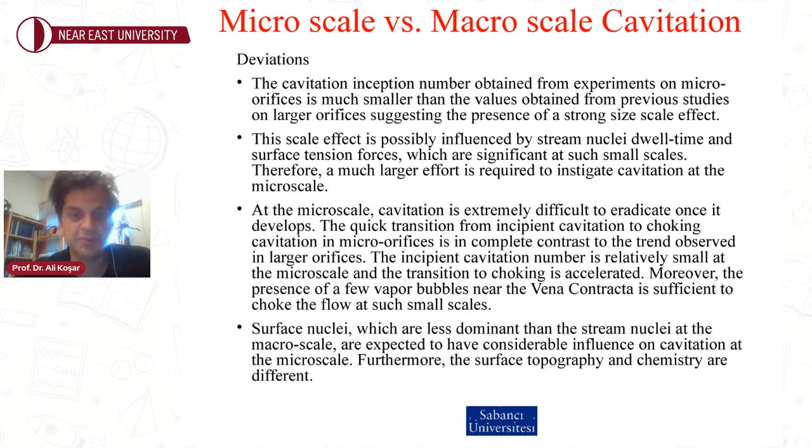And due to the small scale of our system, we could have flow choking. What I mean by flow choking is that we cannot increase the flow rate beyond a certain value. And we have nucleation from the surface, so surface nucleation is more dominant at small scale, meaning surface topography will be important.

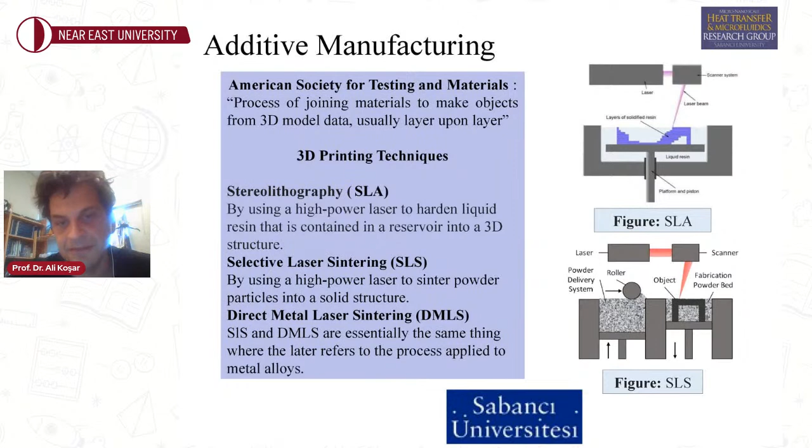And for fabricating the probe, we exploited additive manufacturing. We used three techniques: one, stereolithography; the other, selective laser sintering; and for the final version, direct metal laser sintering, where we have the metallic probe, and we use this metallic probe in in vivo experiments. So we exploited three techniques.

So for stereolithography, we could have a resin material version where we could at least make preliminary tests and have an idea about how the system will function. And then we used SLS 3D printing, where we will have a nylon probe.

We use this nylon probe for in vitro tests, and we could also integrate our actuator to this system, and we could both manually and automatically control this and find target using this probe.

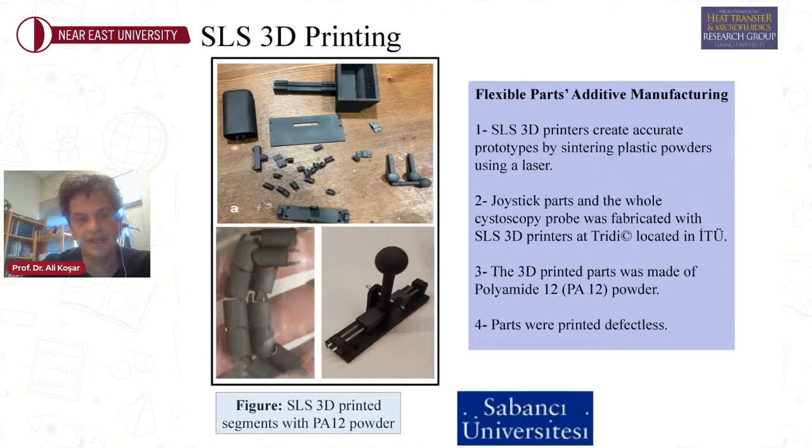And for the final ones, we used aluminum alloy, and we use this version in vivo tests, and it's more durable and also rather light. So we used a metal printer located at Fatih Sultan Mehmet University, and we could fabricate the needed parts, which were defectless and suitable for in vivo tests.

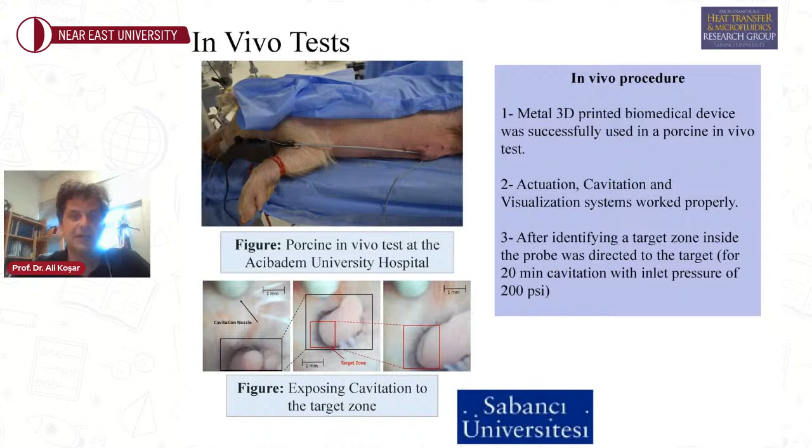We have erosion. However, there was no obvious damage in the area around the defect. So we were happy about the local characteristics of our approach.

So this is, of course, a target which is of conventional size. We can also use this approach for targets which are small, so we can really bombard a certain small target using this approach, like with a lab-on-a-chip version.

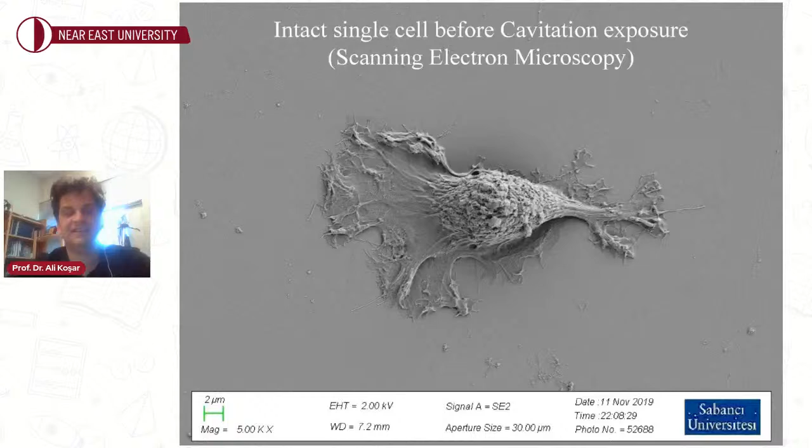So this is what we have. First, we have craters, then we have damage of the membrane, and then we have fragmentation of the entire cell. So we can have different modes of damage.

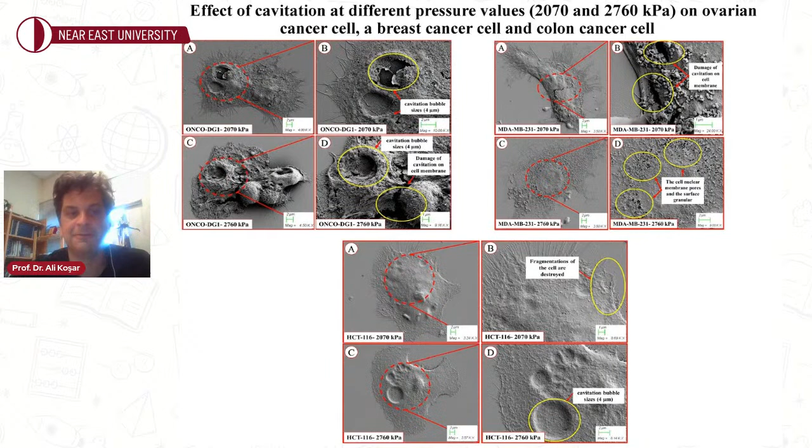And we can, of course, use different cells. Depending on the cell, under the same condition, we have different modes. For example, one cell is more durable, whereas another is less durable. So based on the damage, we can then see different modes of damage on each cell.

But if we have low intensity, the damage is very limited and cannot be detected. If the intensity is too high, we cannot see anything either, since we have pieces of the cell. But if it is something in between, we can really see the differences in the damage on a single cell.

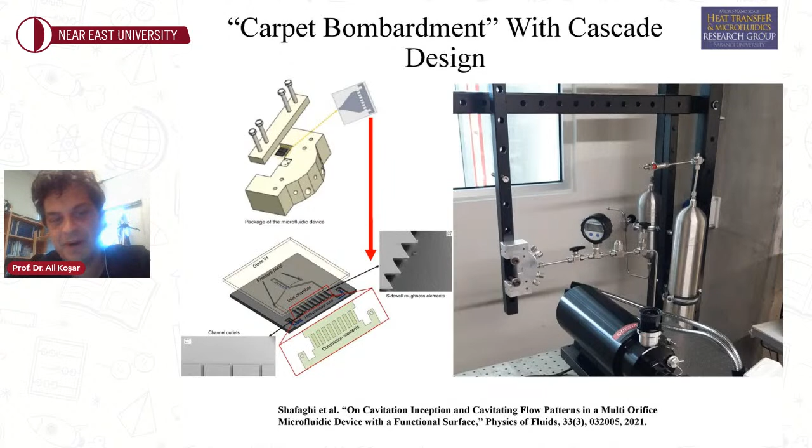So we can also use this tool to characterize the properties of a single cell or tissue. And for tissues, for larger samples, we can have multiple orifices, as you can see from here, and have this cavitating flow from multiple orifices, targeting larger tissues compared to a single cell.

So it is also possible to test them in a lab on a chip device. I think I'm almost at the end of my talk.

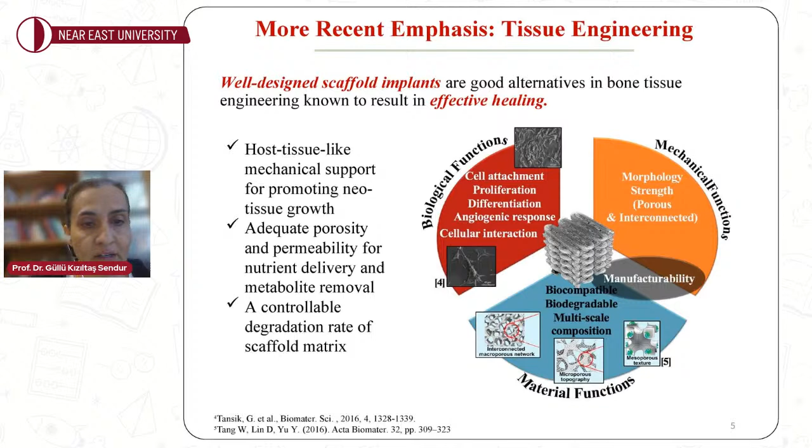Biocompatibility and biodegradability of the material are also key. So it's fair to say that satisfying these functionalities in a scaffold designed ad hoc, or in an intuitive manner by trial and error, is simply not possible. This was the biggest motivation for starting this research.

A few words about the background of these structures. The actual bone itself is a multi-scale structure morphologically, where the compact bone is stiffer than the spongy part, and the porosities tend to vary spatially, not to mention that the multi-scale fibrous and cancellous structure is functionally gradient, as we call it.

On top of that, the healing process is very complex, taking place at different time scales and space scales, with interaction between certain proteins, growth factors, and tissues during healing, which occurs first as inflammation, then soft tissue formation, then hard tissue formation. So the challenge is that this process is multi-scale in both time and space, and you have to accommodate many different mechanisms from different physics at the same time, allowing the scaffold to replicate the actual functioning of bone healing in the most effective way possible.

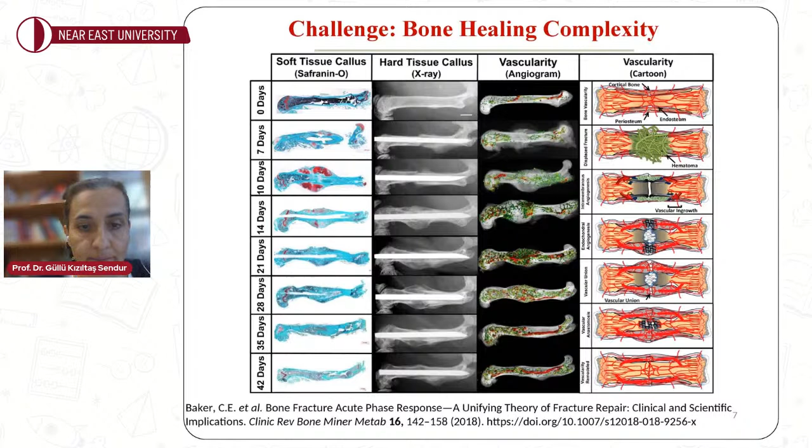In parallel, our early efforts showed that novel material designs through topology optimization are able to deliver novel responses that you could not achieve using ad hoc trial and error with only available material in a homogeneous fashion.

Here are examples of our earlier design schemes that were able to distribute the material. Each color code is a different material that we were able to fabricate using certain dielectric type polymer and ceramic, delivering novel responses that a homogeneous substrate could not achieve.

Back in 2005, the group of Hollister at Michigan showed that this formal technique is able to deliver optimized scaffold configurations made of a single material, published in Nature Materials, establishing the concept that this can be adapted to tissue engineering as well.

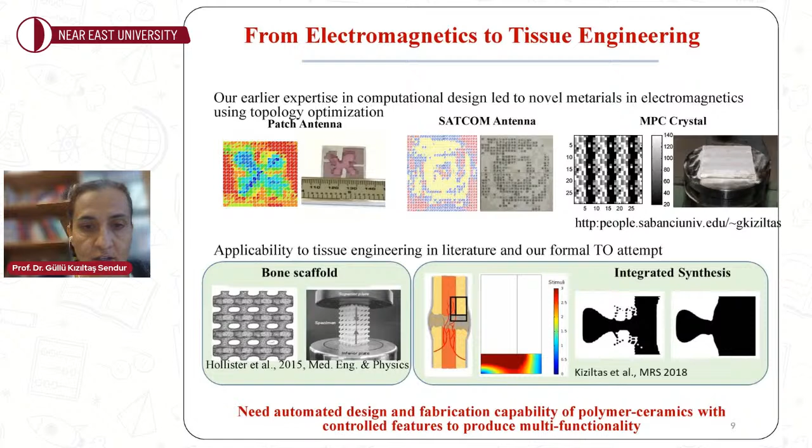We were starting from an initial random design that was simply a regular hole structure, which is a cross-sectional view of the 3D scaffold, and you would undergo a systematic, iterative way where you would update all material cells within a three-dimensional volumetric domain, starting from scratch. You have no idea what this scaffold should be looking like, but you start with a homogeneous block with simple holes that you can represent using level sets, and you compute the physical response in terms of mechanical and fluid flow.

That was our initial attempt, combining certain numerical optimization solvers such as gradient-based or heuristic methods, where you update at each iteration of this cycle the material composition, with each color representing a different material, until you converge mathematically to the strongest structure with minimum shear stress and maximum bone formation. You can then translate this using additive manufacturing nowadays, or hybrid versions of those techniques, to an actual working prototype that you can test further in vitro or in vivo.

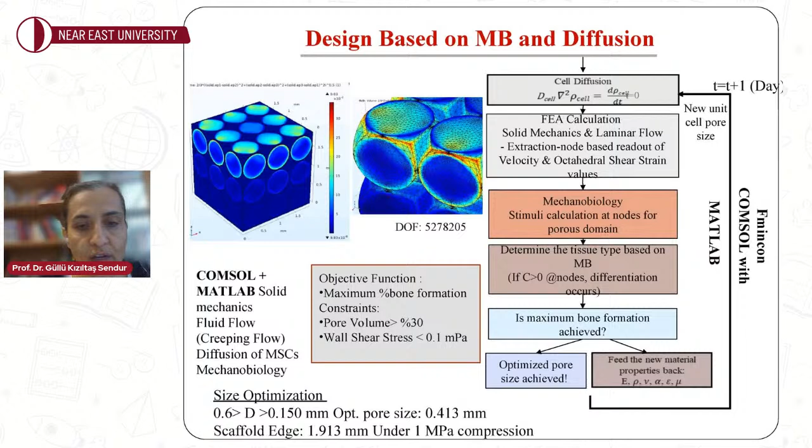This is one design scheme based not on material distribution, but on the size of pores, where we combined solid mechanics and fluid flow response of scaffolds with spherical pores, along with mechanobiology and cell diffusion. You see our metrics here. We targeted maximum bone formation with a porosity constraint and limited wall shear stress to a value that, per literature, enhances cell attachment while avoiding cell death. This effective regeneration, expressed as mathematical functions, delivered a pore size of about 410 microns.

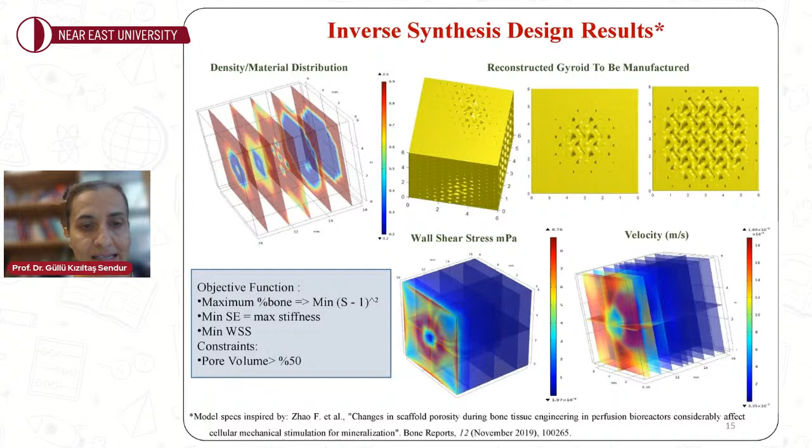We are currently updating this work, and presented last week at the TERMIS EU conference the interaction of regeneration with growth factor release and signaling pathway interactions, by coupling our framework to additional partial differential equations solved using finite element analysis in COMSOL, integrated with optimization in MATLAB. These are the results we presented.

The first column of data represents the concentration of the polymer scaffold made of PCL, with pores in the form of spheres. You see the mesh on the bottom right. The water concentration over time is shown here - the initial state, then day 7, 14, 21, and 28. We see that the polymer concentration undergoes both surface and bulk degradation.

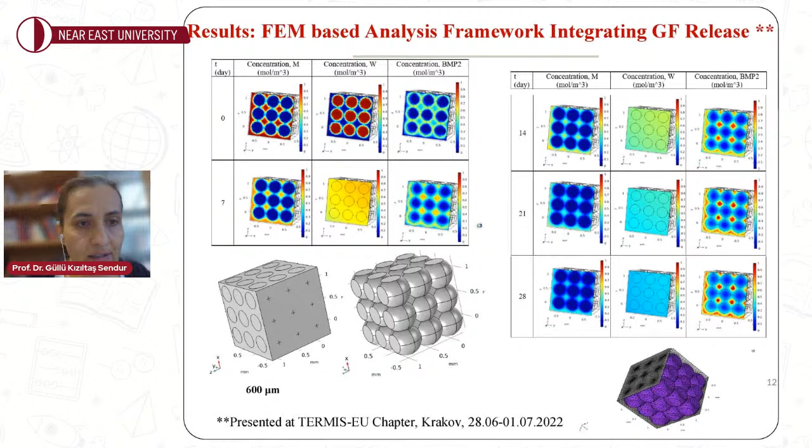We can summarize our fabrication efforts as solution-based printing, which starts with drawing a functionally graded scaffold that is less porous at the center and more porous towards the outside in 3D. We transfer that as 3D G-code into the bioplotter to get these scaffolds. We also do filament-based printing using commercial printers such as the Ultimaker 3 in our lab, with both commercial PCL filaments and our in-house filaments, which are mixtures of ceramics and PCL.

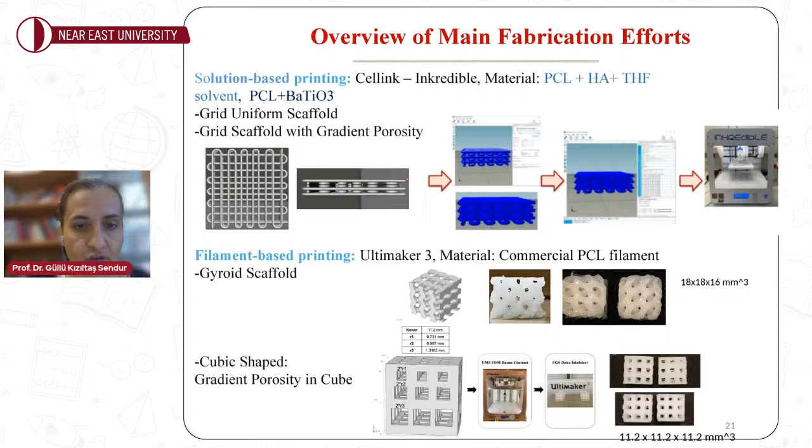Again, a view which shows that this is a nozzle-based, solution-based printing, and we work with PCL and HA. We use THF as a solvent and ethanol bath as the non-solvent. This method has also been proven to work recently with piezoelectrics, and we're currently on the way of publishing that work as well.

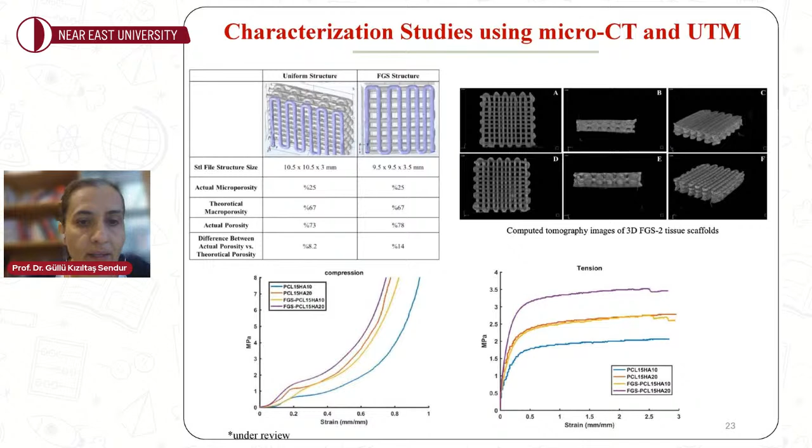Characterization studies show that the morphology was well maintained using micro-CT, and that functionally graded structures resulting from our design studies deliver improved mechanical response, with higher strength in both compression and tension compared with uniform scaffolds, demonstrating the need for designing from scratch using formal methods and fabricating non-uniform, multi-material structures.

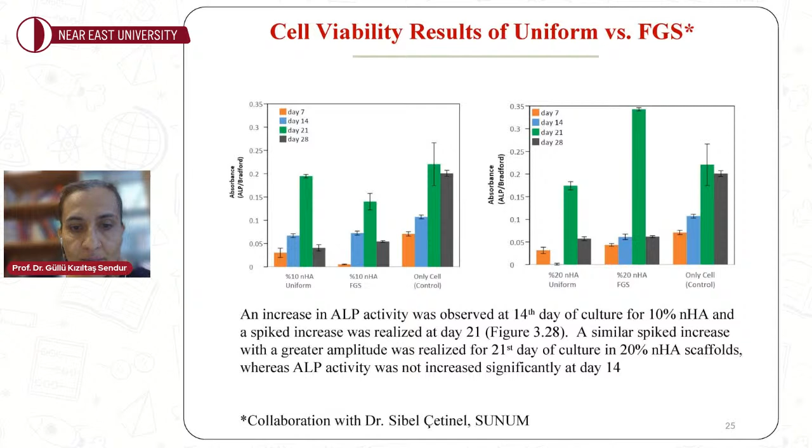Cell viability results, where we collaborate with Dr. Çetinel in SUNUM, show that ALP activity increases steadily, and the FGS proves to be more enhancing compared with the uniform structure. A similar trend can be observed with the nHA addition from 10% to 20%. Both the material and the geometry play a role in optimizing scaffold performance.

UTM mechanical tests carried out this time on a functionally gradient scaffold delivered almost a one-to-one validation of the simulations, with the compressive modulus and maximum strain performance matching under 1 megapascal of pressure.

A similar trend was observed for the gyroid structure that we fabricated using PCL in our lab, and the compressive modulus was very close to what we predicted, with a reasonable discrepancy in the strain response experimentally compared to what we predicted using our simulation codes.

Okay, sorry, I was not using the full screen all throughout. Thank you for noting that.

SEM results of the gyroid scaffolds, carried out using MC3T3 mouse fibroblasts, predicted good cell attachment beyond the 7th day, with nice arching of cells over the struts after the 14th day, with the gyroid structure being more favored compared to the uniform FGS structure shown earlier.

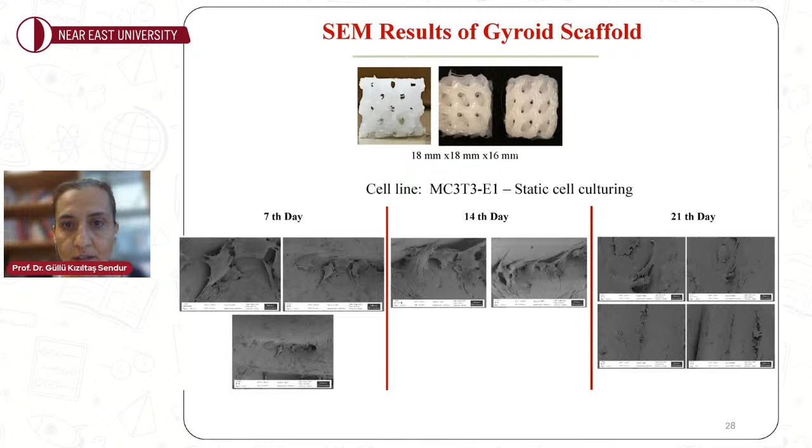ARS and confocal microscopy results of the gyroid scaffold also predicted nice cell attachment and growth within the gyroid scaffold, which was a result of our design studies.

With that, I've reached my conclusions. I want to state that multi-scale analysis-based topology optimization has the potential to deliver novel designs with multifunctionality, and I believe it's one of the strong ways of delivering competing, novel responses. At the same time, you have to undergo three-dimensional material design.

Our current focus is to update our model in terms of experimental evidence and speed up studies in the computational framework, incorporate angiogenesis that we have done in 2D and are updating into 3D, and experimental validation of growth factor release, which we've partially performed, but we are starting the signaling pathway interaction and bone regeneration validation.

Our future focus will be on incorporating surface chemistry and nanotopography, which we know have a drastic effect on bone regeneration. We would like to update that to design patient-specific smart scaffolds by implementing functional coatings into the modeling as well as the fabrication framework.

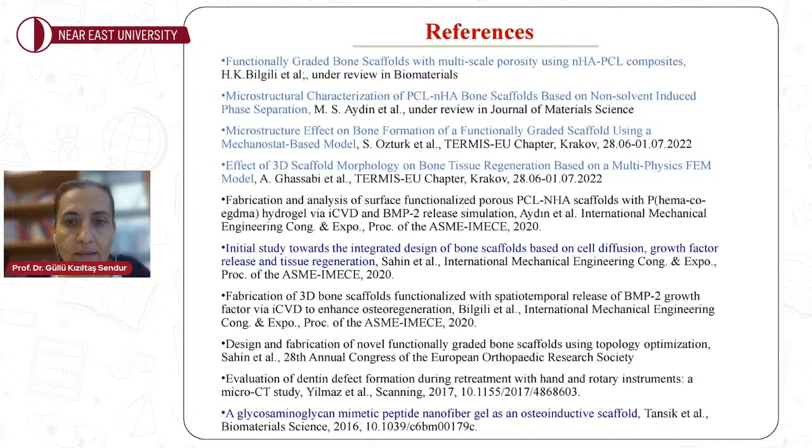There are a couple of references. Two of them are underway. The others are published or presented in recent conferences.

With that, I want to thank you for listening, and I want to acknowledge my former students, my current students, the current and past funding, especially TÜBİTAK 1001, and my collaborators at Sabancı, Sunum, and overseas in Belgium. With that, I want to stop and would be willing to answer any questions that you might have. Thank you.

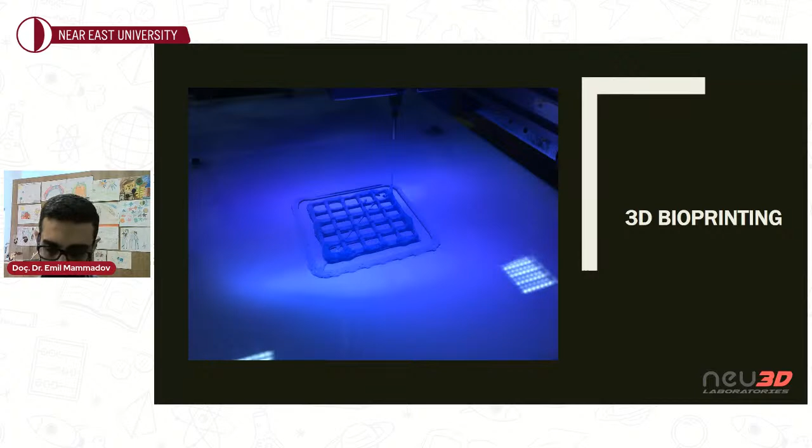So what are the main current technologies in 3D bioprinting? There are a lot of different techniques, but I will talk about the 4 most frequent bioprinting techniques, starting with inkjet bioprinting. I'll give a small introduction to all of them, because the field of bioprinting is very broad, and there are whole books written on it. So in order to fit this in a small time frame, I will be precise and just give an introduction to these techniques.

The second one is laser-assisted bioprinting. The third one is stereolithography. And the fourth and most frequent one is extrusion bioprinting. So let's start with inkjet bioprinting.

As you all know, inkjet printers were first developed by Hewlett-Packard in the 1970s and were patented at that time. In 1988, Klebe and his colleagues introduced a technique which uses an inkjet bioprinter modified to hold biopolymer and cells. It uses the same method to disperse cells inside the bioink instead of normal ink.

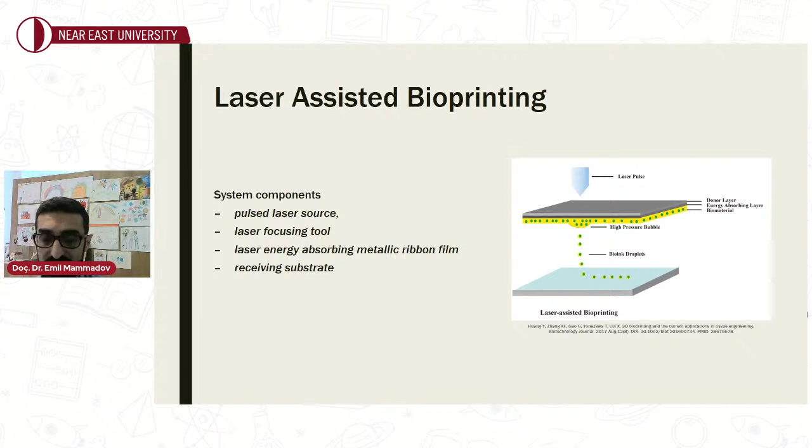The other type is stereolithography. This method actually is the first 3D printing method that was developed. It was developed in the 1980s, and it was the first 3D printing method that was published. After that, the fused deposition modeling method came, which we all use now. But stereolithography is the first method, and it's used in normal systems, in industrial bioprinters.

Stereolithography, SLA printers, use special photosensitive resins, which are cured by a light source, a UV source, and when this light shines on the photosensitive resins in layers, it forms layers, and it's the only bottom-up approach in 3D bioprinting.

However, SLA 3D bioprinting, actually DLP, digital light projectors - we don't use lasers, but we use digital light projectors here. It's a more recent method. It's a very precise method.

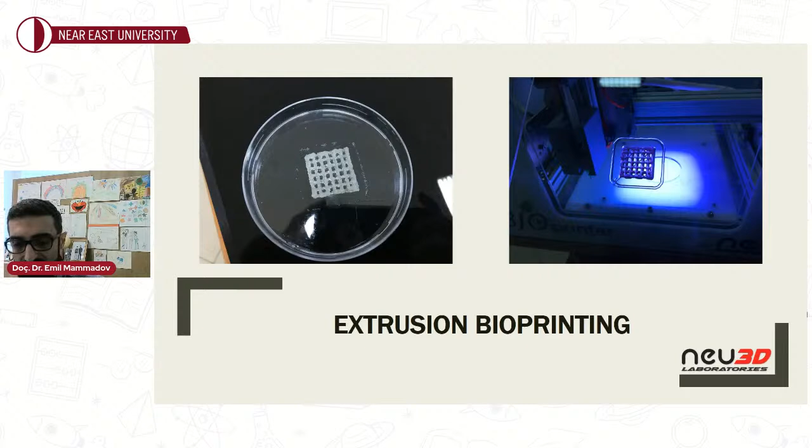Recently, we removed the enclosure and put the machine inside the biosafety cabinet. I'll show you the video of our printer in work. You may form different structures by changing the nozzle size and changing the G-code. You may print different scaffold types.

These machines are not as precise as laser-assisted bioprinting or stereolithography bioprinting, but they still do their work, as you see.

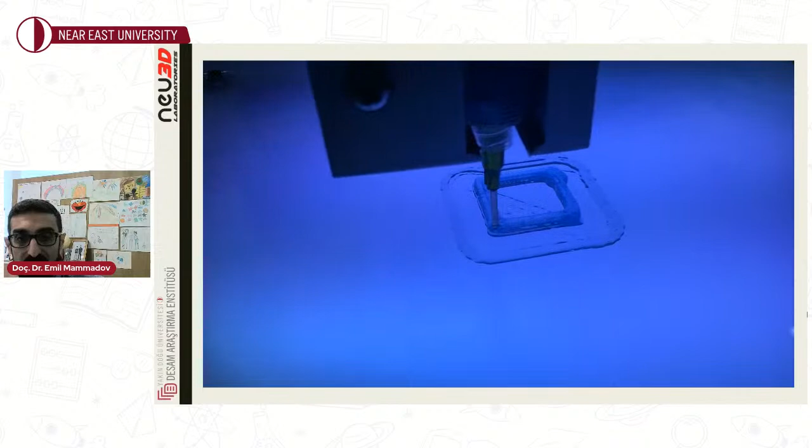Of course, you have to be very well aware that these machines are not plug-and-play machines. You have to be very confident in G-code knowledge. You have to know what slicing is. So without proper 3D printing experience, it's extremely hard to handle these machines.

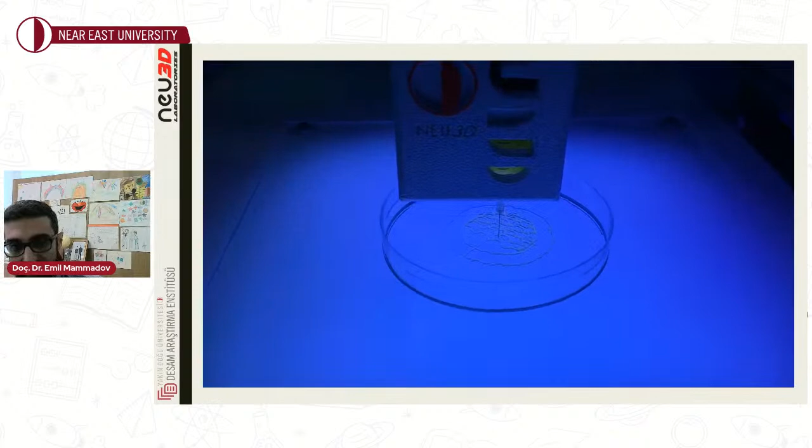However, we also use gelatin and alginate, and gelatin-alginate, and Professor Terin Adalı provided us with her alginate-chitosan hydrogels to try out in these machines.

As you see, this is a gyroid pattern that we are printing now.

The prints are all done inside the sterile chamber and by sterile nozzles, using sterile syringes.

Of course, you may also not only print the scaffolds, you may slice tomography or MRI images to print exact structures fit for the patients. This ear structure was segmented from the CT scan and printed on our machine using hydrogel provided by Professor Terin Adalı.

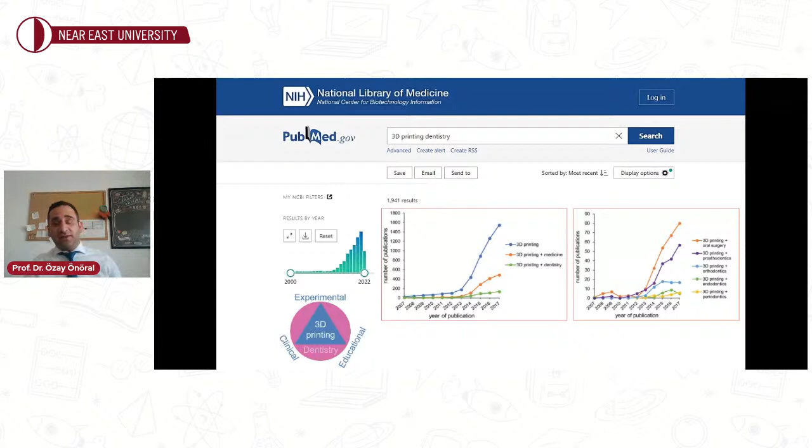In computer-aided design and computer-aided manufacturing technologies, which initiated with the mapping of intraoral tissues in 1977, rapid advancements have been experienced, and today 3D printing and bioprinting opportunities have come to the fore. The application of CAD and CAM in dentistry has progressed ever strongly over the past few decades, and it has led to the fast diversification of materials and to the digitization and automation of the process.

The CAM process, CAM software, cuts the STL file into multiple horizontal layers, in the XY plane. This is the so-called slicing process. The different slices contain path information like X, Y coordinates. The result of the slicing is the so-called G-code, which contains the machine commands for the printer. Thinner layer thicknesses are associated with smoother objects, but also a longer printing time.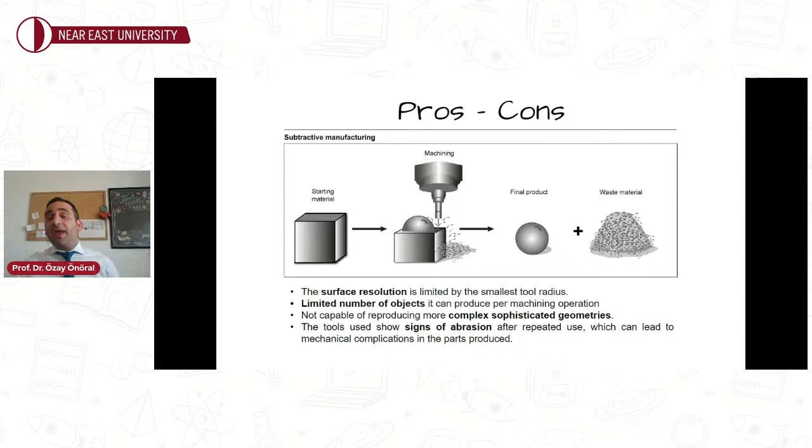In the subtractive route, a significant amount of residual waste material is generated each time, unfortunately, and this waste material cannot be recycled. From a procedural and ecological point of view, subtractive production has the disadvantage that surface resolution is limited by the smallest tool radius. The subtractive technique also has a limitation regarding the number of objects it can produce per operation, and it's not capable of reproducing more complex or sophisticated geometries. Furthermore, the tools used in the fabrication process show signs of wear or abrasion after repeated use, which can lead to mechanical complications in the parts produced.

Let's go ahead with the additive technologies, because they are a novel technology especially in dentistry. In the additive route, a very limited amount of waste material is generated each time, and this waste material can be recycled - that's good news. Also, complex, sophisticated geometries with very fine details and higher accuracy can be produced with this route.

However, in this route, staircase effect and balling effect are the main concerns encountered by clinicians or operators. Let me give brief information about these effects and then go ahead with the next slide.

Stair-type effect, in the layer-upon-layer fabrication of the additive method, creates rough surfaces in the final product, especially at the corners. This phenomenon is called the stair-type effect because these rough surfaces look like actual stairs. You can handle this by reducing the layer thickness to the smallest possible value. You can significantly reduce the incidence of this effect this way, but it should be noted that the fabrication time will increase significantly with this method.

Let's go ahead with the balling effect. It's a common failure in additive techniques - specifically I can mention selective laser melting, which we're going to discuss later. The balling effect is a common failure especially in selective laser melting. This phenomenon can increase surface roughness, reduce density, cause pores in the final product, and in severe cases even hinder the fabrication process.

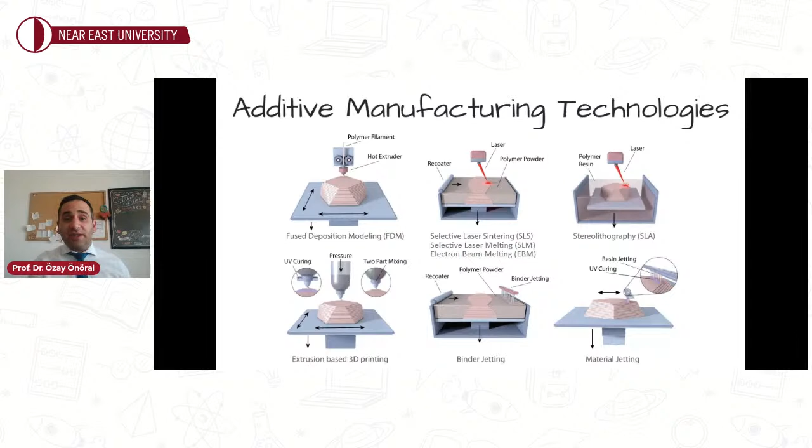You may ask in which departments the 3D printing technologies are most common, but I can say that in almost all departments, like prosthodontics, orthodontics, surgery, every single department, we are most probably using 3D printing advancements and applications.

Let's get started with stereolithography. SLA is most probably the first commercially available 3D printing technology.

This rapid manufacturing method involves photo-induced free radical polymerization to create layered structures using highly cross-linked polymers. The exposure of the monomer activates the polymerization reaction, which stops locally due to solidification and limited movement of the free monomers.

This technology may be subdivided into different categories, in accordance with the platform motion - ascending or descending motion - and laser movement.

The prominent features you may encounter for SLA are high resolution, accuracy, rapid fabrication with very smooth surface details, the ability to create complex, sophisticated parts with very fine details, and nozzle clogging can be avoided with this technique.

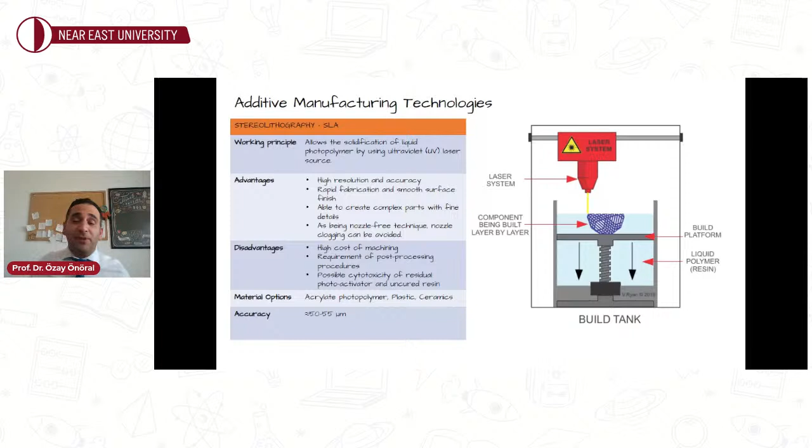All these things make SLA a good choice in dentistry with a plethora of material options, namely acrylates, plastics, and ceramics, which we can use in the fabrication of lots of appliances with the aid of SLA technology.

Moreover, the extinction coefficient K depends on the intrinsic properties of the resin, which includes the loading of fillers, the surface of the fillers, and the refractive index of both fillers and the resin.

You may ask why I'm explaining such formulas and making the procedure complicated, but this stage is very critical. If there is a mismatch in the refractive index between the fillers and the resin, the laser light will be scattered significantly, resulting in a reduced polymerization depth.

This effect can result in a previous layer not connecting to the next layer, and you can encounter routinely delamination of the stages, unfortunately delamination of the layers.

Why is this important? This is very critical, and it plays a critical role in material preference. I'm going to show you a slide in the next slides and explain why it is so critical, the material preference at this point.

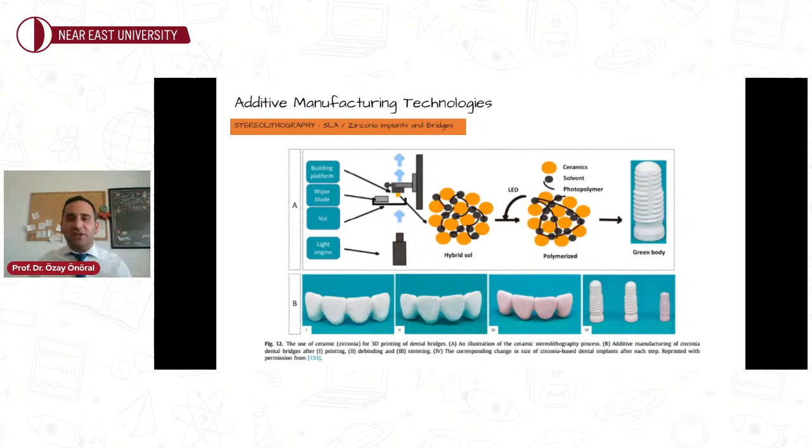The titanium implant has an opaque appearance, and if there is very thin tissue over there in your patient, this may reflect underneath issues, causing an unaesthetic result. You can fabricate the zirconia implants with SLA technology.

That's brilliant. It accommodates flexibility in design, geometric shapes, and scaling, resulting in highly accurate personalized devices. For instance, the use of SLA printed drilling templates to transfer virtually planned implant placement into reality has become a standard fabrication method with navigated implantology, and is superior to other procedures like milling, for example.

Although SLA printed dental devices suffer from poor mechanical strength, incorporation of nanoparticles into the polymeric matrix increases its strength. As I mentioned previously, material preference is very critical, which influences the longevity of the product you have produced.

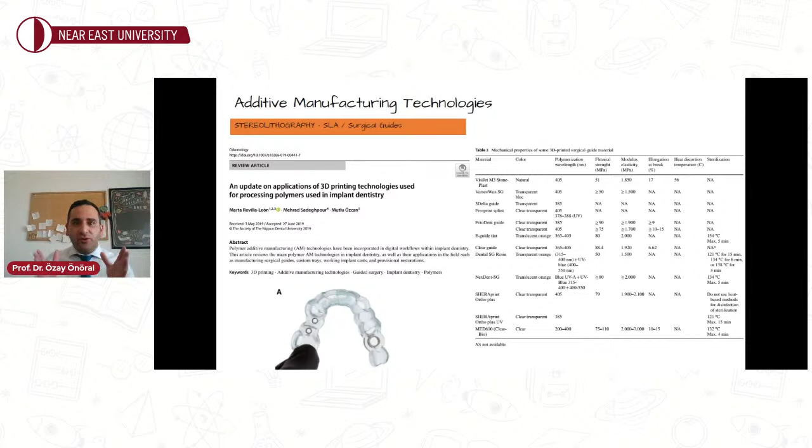Have a look at the alterations, for example in the flexural strength values - 50, 80, 90 - and you can understand from this that changing the material type will alter your mechanical, surface, or other characteristics, although doing the whole procedure with the same SLA technique and machine.

SLA is also beneficial in the fabrication of castable patterns, which are helpful in the fabrication of prosthetic restorations, both temporarily and permanently fabricated. We can fabricate all these restorations with subtractive methods definitely, but that leads to a large amount of waste material. That's why it's more beneficial to use this technique for the fabrication of temporary or permanent crowns.

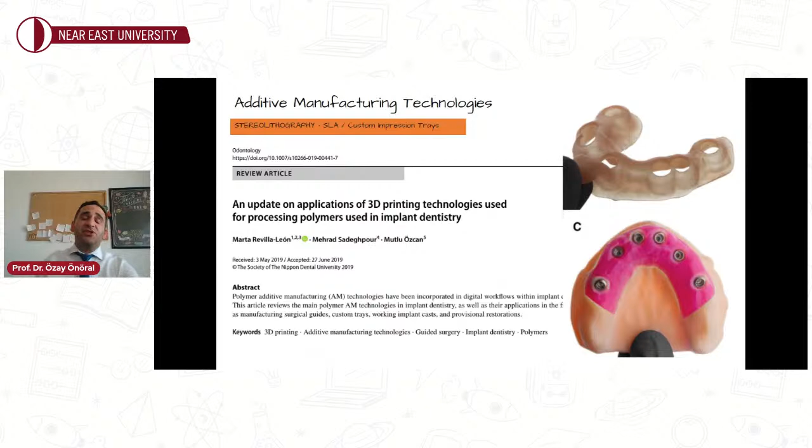Trays also for conventional impression procedures can be accurately fabricated with SLA technology. SLA not only for the tray but also can be safely used in the fabrication of study or master models of patients. Traditionally, we use gypsum models in dentistry, which can deform day by day, hitting down or being reshaped easily, and cannot protect their dimensional accuracy. However, the durability and dimensional accuracy of SLA fabricated models, as you see in the slideshow, is definitely superior to gypsum models.

Let's go ahead with the second technology. It's quite similar to SLA technology, but DLP, the digital light processing technology, is a little different. A microsystem, an angular mirror device called a digital micro mirror device, has light switches that project light from the source as individual pixels onto the projection surface. Resolution of the projected image corresponds to the number of these mirrors.

The most prominent feature of DLP technology is that every layer can be cured with a single shot of laser exposure, not exposed point by point like in SLA technology. Here, one shot and all layers can be cured specifically, individually, in a single instance.

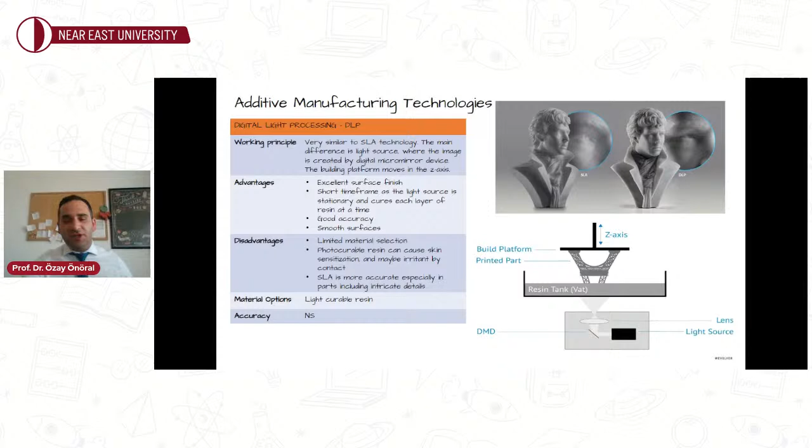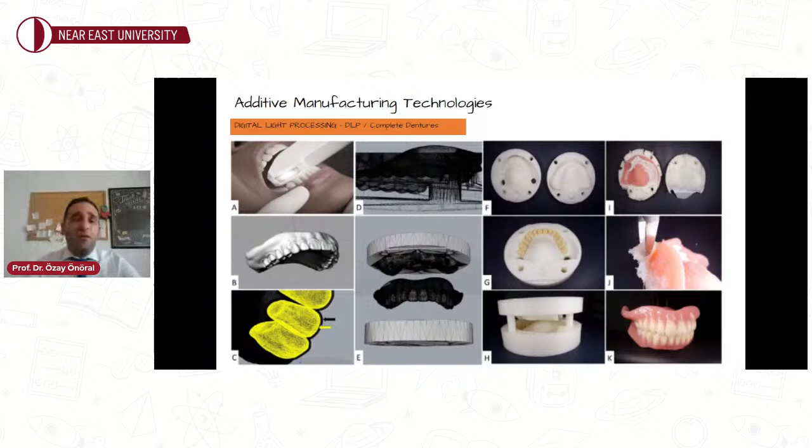We can produce complete dentures with DLP technology, including the base of the denture. In the current slide, you can see a proof of concept showing how complete dentures can be produced with the aid of DLP technology. Root analog implants are also made with the aid of DLP technology, but it's still experimental and they are still working on it.

DLP, like SLA technology, can also be safely used for study and master models of patients.

SLA and DLP are quite similar to each other, but they have small differences. The main difference is the light source. SLA benefits from an ultraviolet laser beam, while DLP uses ultraviolet light from a projection source. Consequently, in SLA, the laser beam moves from point to point and cures the resin, but in DLP, the light source is stationary and cures each layer of the resin at a single time.

If you're talking about rapid production, DLP gives you very good results; you can extremely rapidly produce what you want with this technology. But if you're talking about fine details, accurate parts with intricate details, I recommend SLA technology to fabricate your product, because it presents much more accuracy and finer details.

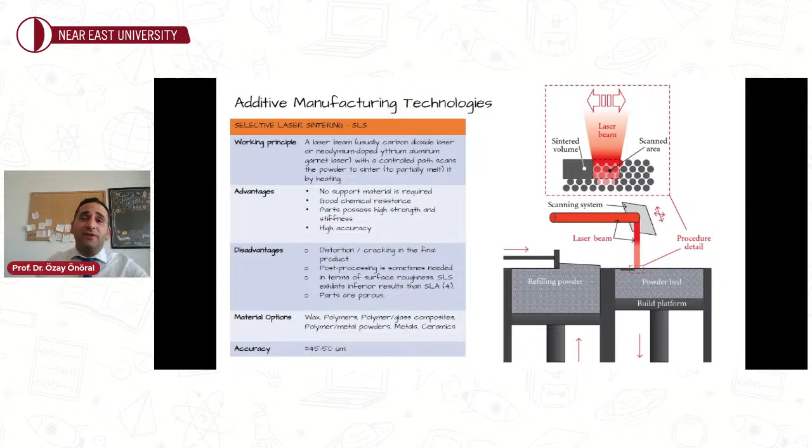This technique is very popular in contemporary dentistry, specifically in the fabrication of metallic frameworks, as you see in the slideshow. For instance, frameworks of hybrid prostheses, frameworks of removable partial dentures, metallic scaffolds, and titanium implants can all be made with SLS technology.

The temperature applied by the laser throughout the process should be kept well below the melting point of the metallic powder, and the heat should be sufficient to sinter the particles of the material. The material is not completely melted in this technology—only sintered, guys, which saves a lot of time during fabrication.

Have a look here, that's a very important article I found lately. In particular, hybrid prostheses like the ones produced with SLS technology suffer in terms of weight. For this reason, the metallic infrastructure of hybrid prostheses has started to be produced with an approach called the truss effect, which is evacuated and combined with triangular connections in its inner structure. In new studies, they have investigated this production style, and the good news is there is no loss of mechanical properties, but the weight of the prostheses significantly decreased, guys.

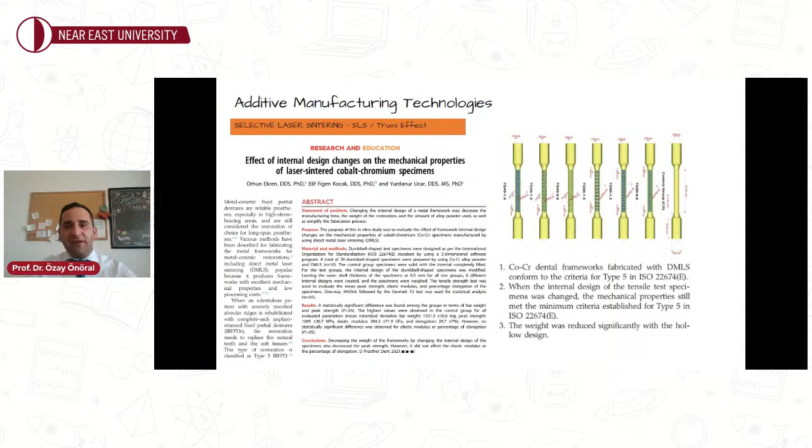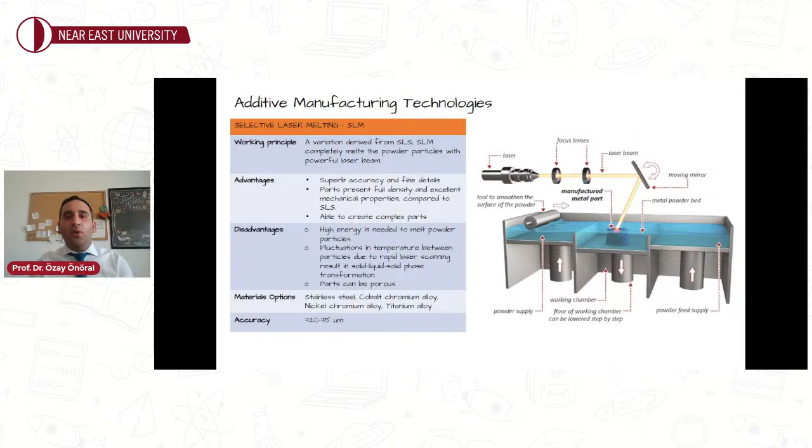SLM, another technology, can be thought of as a variation derived from SLS technology, because the same steps are applied in both techniques. The main difference is that SLM completely melts the metallic powder particles with a powerful laser beam, and a melt pool is formed. Thus, at the end of the production phase, metallic parts with almost 100% density and superior mechanical properties are obtained without the need for any extra post-processing. Moreover, it is advantageous to carry out the process under inert gas, since liquid metals cannot wet the surface because of surface oxide films.

However, quick fluctuations in temperature—changing state quickly from solid to liquid and liquid to solid—can cause mechanical complications, namely stress accumulation on the product, distortions, shrinking, cracking, or balling effect. You remember earlier I described and briefly informed you about the balling effect. This is commonly encountered in selective laser melting technology, as you see in the slideshow.

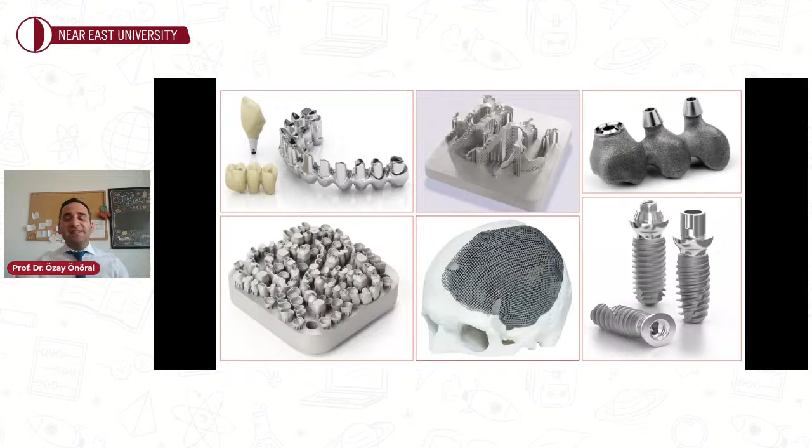Likewise, in selective laser sintering and selective laser melting, we can produce frameworks of hybrid prostheses, frameworks of removable partial dentures, metallic scaffolds, and implant parts such as abutments. We can produce all these things with the aid of selective laser melting technology. In our very recent study, it has been proven that SLM fabricated implant frameworks exhibited superior fitting accuracy, and SLM technology can be recommended as an alternative for implant framework fabrication. There are traditional gold standard fabrication methods like casting, but SLM is coming forward with all these properties.

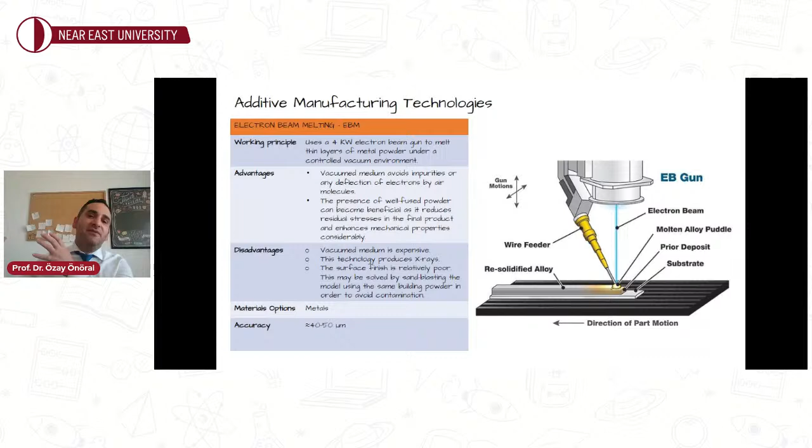Another fabrication method I'm going to talk about now is electron beam melting. Typically, selective laser sintering, selective laser melting, and electron beam melting are quite similar to each other, but in this device we are not using a laser. In this technology, an electron beam gun is located at the top of the vacuum chamber, and the operation starts by sending an electron beam from the filament. A series of coils is used to control and scan the bundles, and by accelerating the electrons between the anode and cathode ends, the energy required for melting the powders is produced. Using electron beam instead of laser is the main difference between electron beam melting and selective laser melting.

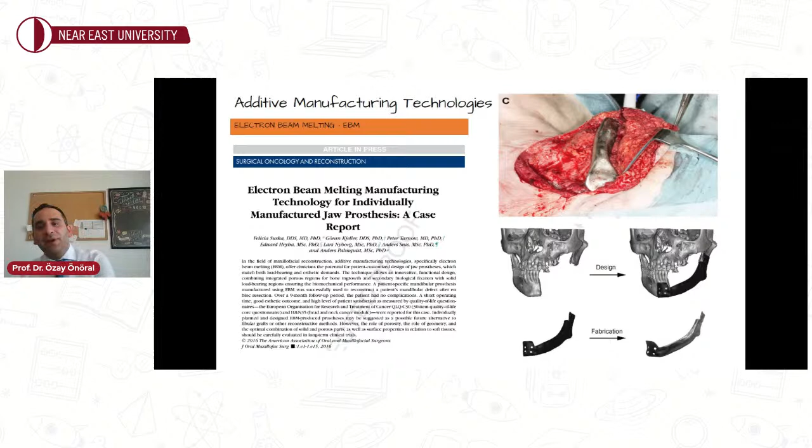Electron beam melting, unfortunately, has a single material option—metals, metallic powders. But it is a good choice for the fabrication of dental implants, as you see in the slideshow. Here again, an electron beam melted printed partial mandibular part was implemented for rehabilitation, as you see in the slideshow. There are a number of studies targeting electron beam melting fabricated dental implants, as you see in this slide and the next. They are working on it.

It's experimental, but good results are achieved with this technology in the fabrication of dental implants. This is another commercially available technology, specifically used in dentistry, commonly used actually.

The FDM technique, also known as fused filament fabrication, has widespread use among AM technologies due to its relative inexpensiveness, high speed, and simplicity. Everything can be supplied with the aid of fused deposition modeling.

This technique depends on the deposition of thermoplastic material in a semi-liquid state through a nozzle that extrudes material in a specific path to form layer upon layer, a 3D model, and the extrusion head heats the material.

The thermoplastic material is in a strict shape and comes through, and when the filament gets hotter, it melts, but not at too high a level, because when it touches the platform, it completely stops the melting process and sets immediately upon touching the platform.

The molten viscosity has to be high enough to provide structural support during fabrication, but also low enough to allow extrusion. Remember, nozzle clogging cannot be encountered in SLA technology, but this is a nozzle-based technology, and it can cause nozzle clogging.

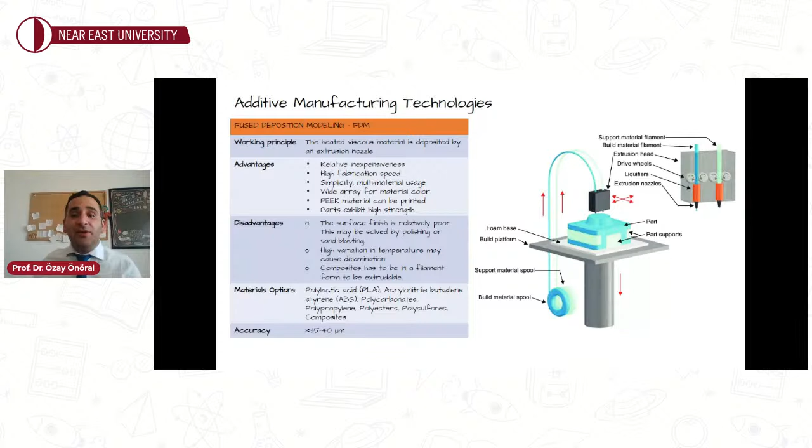Multiple nozzles are available in contemporary dentistry. You can print with multiple nozzles and also with multiple colors. Currently, it is feasible to fabricate custom trays for impression procedures with FDM technology.

Now we come to the point where we talk about the fabrication of polyether ether ketone medical implants with FDM technology.

Various experimental studies are carried out on the fabrication of ceramic restorations with the FDM technique. Its mechanical properties are not sufficient, unfortunately. This technique has revolutionized the fabrication of restorations.

It enables the production of a large number of temporary restorations very quickly, and this has changed dentistry, because no more are other technologies able to be used for the fabrication of temporary restorations. FDM is doing its best in this area.

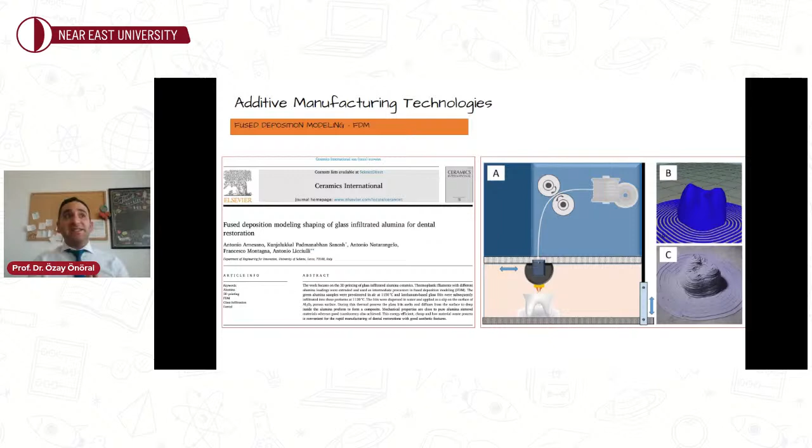FDM is taking further steps towards becoming the gold standard of temporary restorations. Like in the DLP technique, complete dentures can also be fabricated with the aid of FDM technology.

The technique I want to mention today is photopolymer jetting. In photopolymer jetting, the light-sensitive polymer is jetted to a building platform from an inkjet printing head and cured layer by layer on the descending platform.

The most outstanding feature of this technology, compared to the others I have described, is that you can produce with rubber-like materials like silicones, down to 16 micrometers, and this opportunity makes photopolymer jetting the best candidate for fabricating maxillofacial prostheses.

Multi-color jetting is also available in this technology. However, the drawback is that only resins, waxes, and silicone-like rubbery materials are currently available in this technology, unfortunately.

I want to show you the developmental process of the materials used in the fabrication of maxillofacial prostheses, and also the techniques used in maxillofacial prosthesis fabrication.

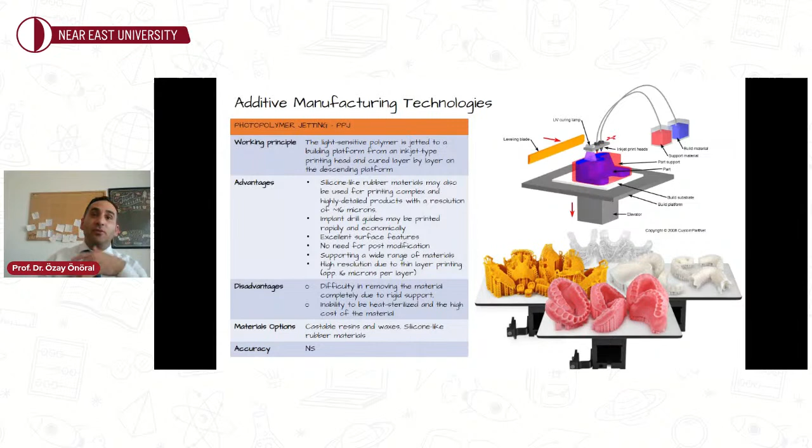Again and again, I'm telling you, you can fabricate maxillofacial prostheses with other technologies like SLA or fused deposition modeling, as you see in the slideshow on the right-hand side.

I have reinforced all the previously mentioned dental implementations of 3D printing with scientific studies. This technology in dentistry is not rough or experimental trial and error to find something to use in dentistry - it's actually scientific, and we are completely confident in 3D printing.

That's very good news for us, because we can produce customized, accurate products in a very short time, which is important especially in dentistry, providing a mechanically sound restoration to a patient in a very short period of time. That's the most critical thing in dentistry.

Let's go ahead with 4D printing. We have finished 3D printing, but now the main topic is 3D printing versus 4D printing. 4-dimensional printing adds the time dimension to 3D printing by producing pieces made of bio-oriented smart materials, as you see in the slideshow.

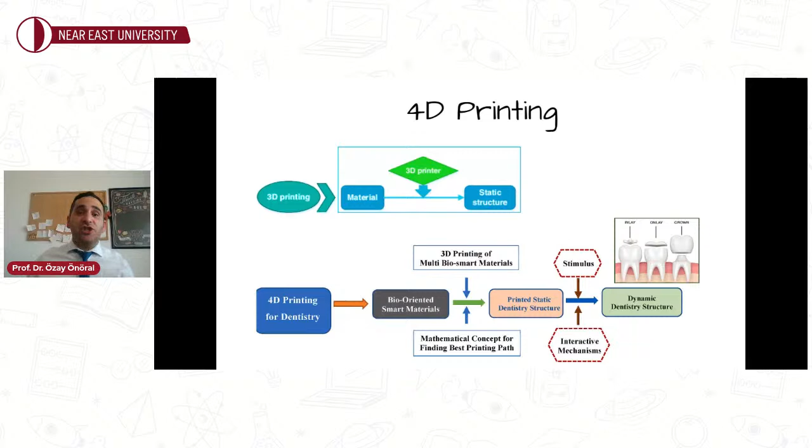4D printing indeed combines 3D printing with the use of responsive materials that change their properties or shapes in response to mechanical, chemical, or electrical stimuli.

Materials may be divided into shape memory materials and shape changing materials. Shape memory materials derive from alloys, polymers, or ceramics, and each material has advantages and disadvantages. I have very limited time today, so I'm not able to explain every single material, unfortunately. I want you to know that we have lots of material options that we can prefer according to their physical, mechanical, and biological properties, each with its own advantages and disadvantages.

Shape memory polymers have applications in dentistry, including orthodontics, endodontics, and prosthetics departments. Let's have a quick look at these.

One of the most common materials used in orthodontics is nickel titanium arch wire, with many advantages and disadvantages. Some of the drawbacks of shape memory arch wires may be overcome with the application of shape memory polymers: superior aesthetics, improved elastic modulus, enhanced mechanical and dimensional stability, and the ability of the arch wire to self-adjust during treatment, making the material more suitable for the patient and the dental practitioner.

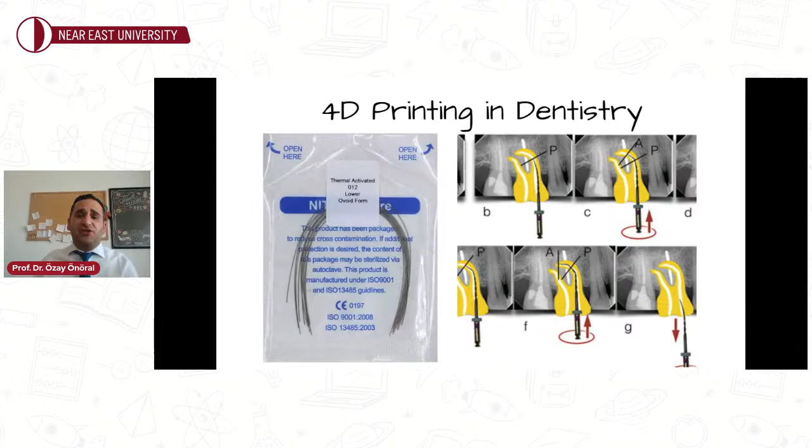What about prosthodontics? It's my department, and I want to mention a little bit about prosthodontics before finishing my presentation today.

In prosthodontics, permanent seating of pontics, as shown in the photographs and illustrations, while surrounding hard and soft tissues undergo changes, may result in suboptimal fitting of the pontics. Use of shape memory polymer materials in these restorations may be beneficial because of the self-adjustment capability of the material, also in full or partial removable dentures.

After the loss of natural teeth, we can encounter bone loss in complete or partial dentures, partial edentulism, and the bone can go on to lose its volume. This bone resorption can be addressed with 4D printing. Denture relining is a common procedure to fix issues arising in complete dentures, and if you use shape memory polymers for 4D printing of complete dentures, despite bone resorption, the denture may adjust with the aid of these materials, with no more need for denture relining.

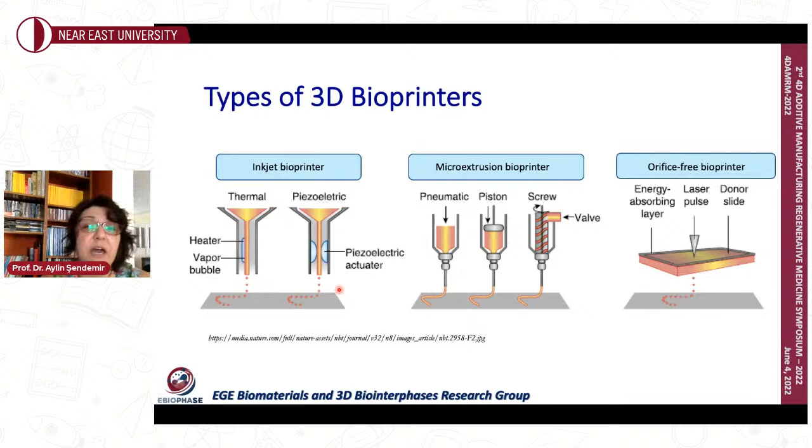Emil Hocam had given an introduction of different types of bioprinters, and I will not repeat what he already said, but I just want to point out that going from inkjet printing towards laser printing and extrusion printing, we're losing some speed. So as we go from inkjet to extrusion bioprinting, the high throughput or speed of printing decreases tremendously. That's why the most commonly used form of bioprinting, extrusion bioprinting, is not a fast process.

But looking backwards, why is it most commonly used? Because going from inkjet to extrusion bioprinting, we do have higher cell viability and higher cell density. That's why in terms of bioprinting, we're trying to print alive parts. In 3D printing, we produce the scaffold first, and then we can seed, if we want to, cells on those scaffolds.

Güllü Hocam, for example, in the examples she provided, they were producing the scaffold and then seeding cells on those 3D printed scaffolds. In that case, because printing and cell seeding are performed separately, we don't need to worry about cell viability. But if we're trying to print the live bioink itself, the printing process becomes much more harsh and much more prone to lowering cell viability. That's what I will try to emphasize during this talk.

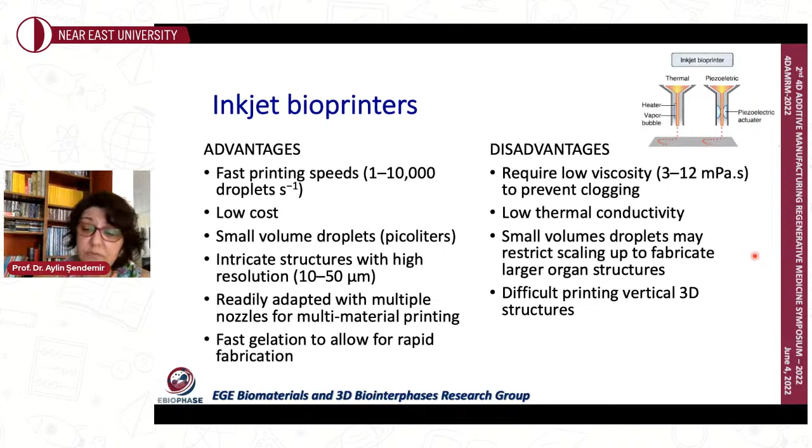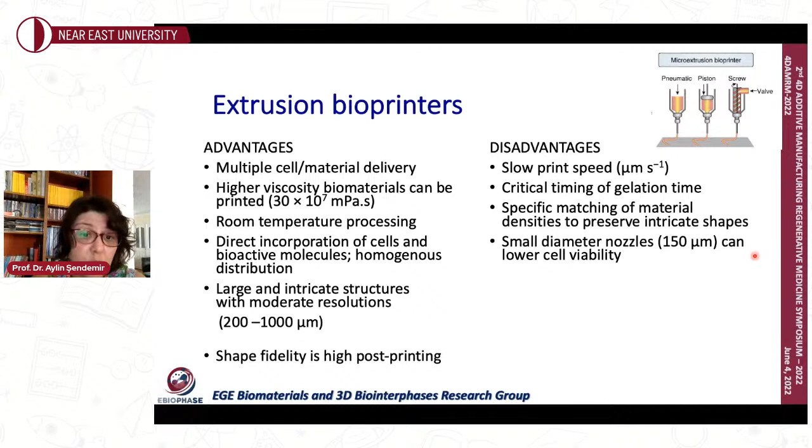Therefore, the most commonly used type of bioprinters are extrusion type bioprinters, where we do lose a lot of speed, but we can carry the cells using different types of gels, and within those gels we can load quite a lot of live cells, proteins, or other biological molecules if we need to. That video, again, you have seen similar videos, so I'm not going to have it played.

When we look at biomaterials for 3D printing, this is probably the reason why 3D printing and bioprinting are used interchangeably. We can use different biomaterials for 3D printing. The fact that the material will be used inside the body doesn't mean it's bioprinting. For example, calcium phosphate bone cements are very commonly used biomaterials in a lot of implantation applications in the body.

But usually these calcium phosphate bone cements, although they can be 3D printed, as there are a lot of examples in the literature, are usually self-setting. During this self-setting process, they give out a lot of heat, usually exothermic. That amount of heat is detrimental - it can lower cell viability, and for proteins, they can be denatured.

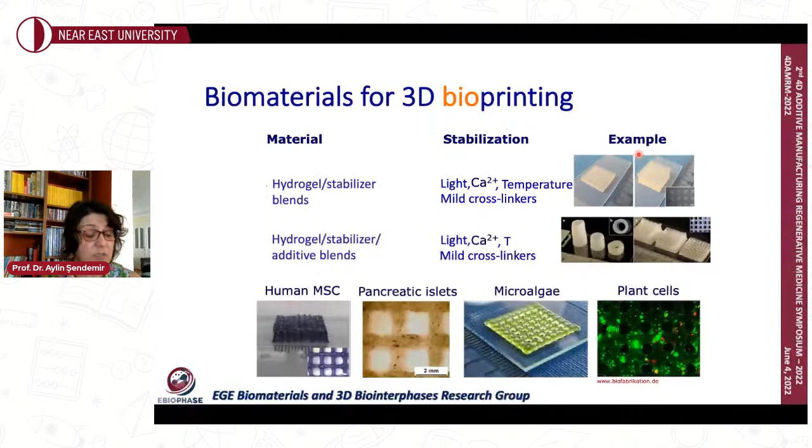We need to look for new strategies that would keep you with lower polymer concentration, so that there is more porosity, more exchange of oxygen and nutrients for the cells, but still have good shape fidelity.

So when we look at the 3D bioprintable materials, we are concentrating on different hydrogels that are environmentally responsive. There we mean responsive to pH, ionic strength, temperature, light, electric or magnetic field. Those stimuli-responsive hydrogels are, of course, what we define as 4D printing, also suitable for bioprinting.

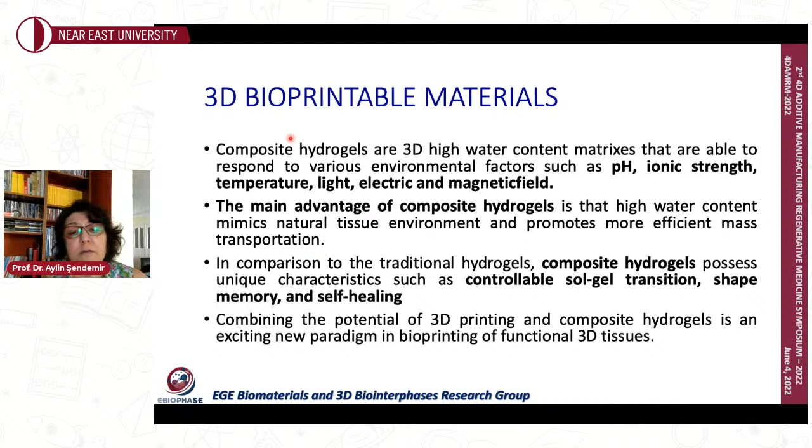So when we look at common materials that are used, again ionic cross-linking, particularly calcium-based cross-linking, is commonly applied in bioprinting. But we all know calcium, all cells use calcium, but excess calcium can also lower cell viability, and viability is not everything.

Also we need to be able to keep the cell properties. So excess calcium might not kill the cells or lower cell viability, but it might change the cellular properties. Particularly, it might cause the cells to differentiate into different phenotypes. So we need to pay attention to how much calcium we can use to cross-link these materials.

Photochemical cross-linking and sacrificial scaffolds—also printing using a sacrificial scaffold, printing inside that scaffold and then getting rid of the supporting material—is a very commonly applied technique.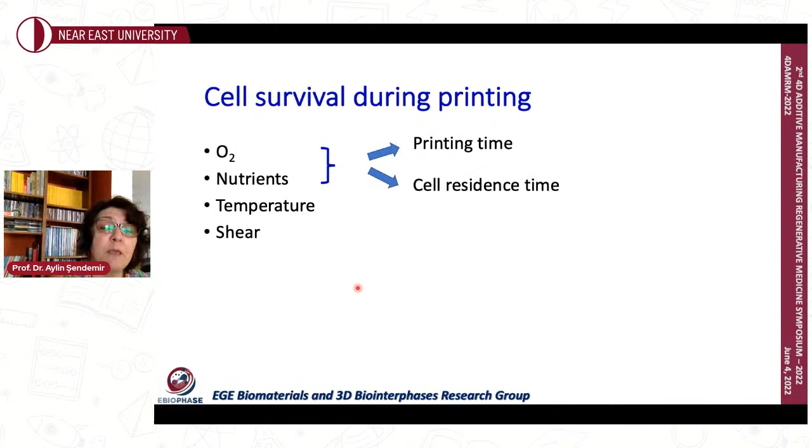When we look at cell survival during printing, or when designing bioinks for bioprinting, we need to pay attention to oxygen - there should be enough oxygen during and after printing. Also nutrients - the cells should always be able to get enough oxygen and nutrients. Temperature should be kept at a cellularly acceptable level during and after printing. Also the shear stress.

Usually this factor is commonly overlooked, but no matter what type of printer we're using - during injection, or even in inkjet or laser printers - during the printing process the ink is subject to quite a lot of shear stress, and this shear stress can affect cellular viability tremendously. So by keeping the chamber temperature high or using a lot of shear during printing, you can get a stable structure, but you might possibly lose most of your cells during printing.

Therefore, particularly, some simulations or in silico representations of the printing process would be very helpful, because in the literature it is known how much shear different cell types can bear. And even some shear is helpful for cells - it does trigger some types of differentiation, or it might even increase cellular viability.

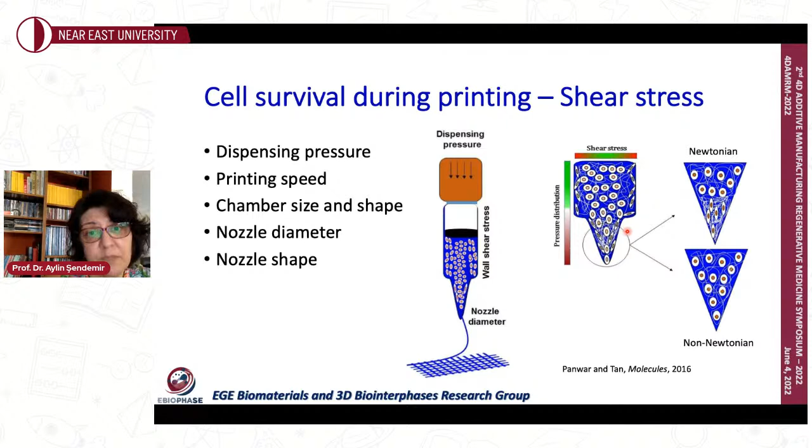Also, to increase cell survival after the printing process, there are different techniques and approaches to induce pre-vascularization or rapid vascularization after bioprinting. This includes use of different techniques, for example using a 3D printed structurally stable bone scaffold, and in that scaffold printing cell-laden hydrogels. Again, one material keeps the structural integrity while the other keeps the cellular body alive and healthy, with vascular grafts in between so that after implantation, particularly in tissue engineering applications, it can keep the cells viable.

So we have a lot of different approaches to improve cell viability, but choosing the right bioink is not easy, not trivial. Most of the time, a lot of my students think that the first time they try in the laboratory, they will succeed. No, that's not the case. It needs quite a lot of time and effort to optimize bioink concentration.

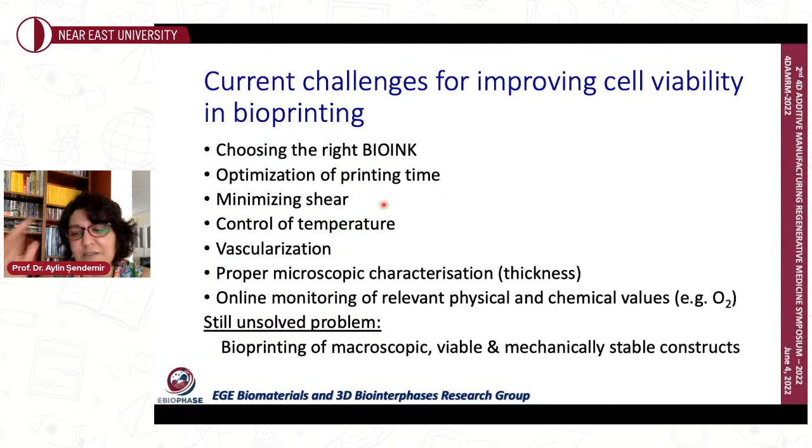But I hope with these little bits of clues, I may have given you an idea on how to continue. So good luck. We are continuing to work on this, and hopefully more and more people will join the bioprinting community too. Thank you very much, and I would be happy to answer any questions.

Yes, please. Any question? I think not. Yes, Aylin Hocam, I have a question.

Please, because bioprinting is a very interesting topic, especially for regenerative medicine and artificial organ design. As you emphasized, nowadays it's possible to design thin tissues, but for complete organ regeneration there are a lot of problems to solve. Now, what type of materials, for example natural biopolymers, are your favorites? You know that biocompatibility properties are very high for them. What other biocompatibility properties are important during the design of the bioink? Not only for natural biopolymers, of course. If we talk about bioink for tissue design, how we're going to biomimic them is a big problem. So what type of biocompatibility properties are important in the design of these types of bioinks?

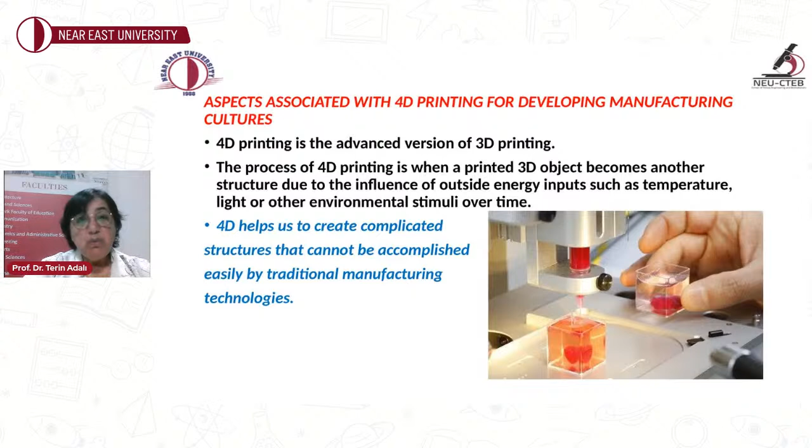Now, 4D printing—as Hocam said, the difference between 3D printing and 4D printing is one extra dimension, which is related to time. So in biomedical applications, it provides improvement, and you are able to configure any smart material in response to the stimulation of the post-printing process. So this is very important for us in the design.

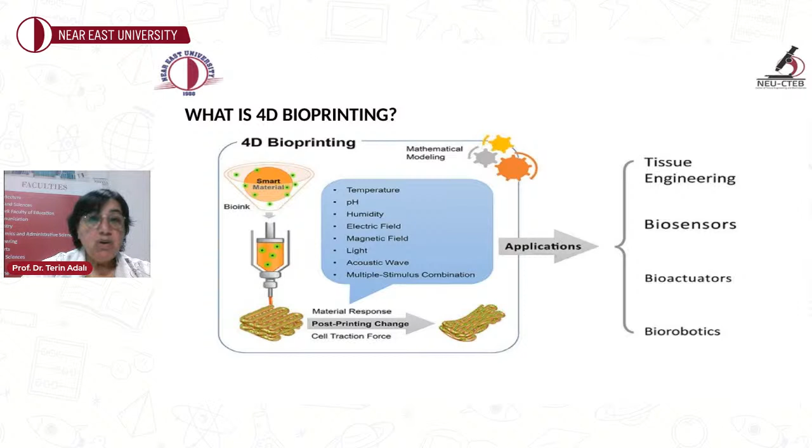Applications are very important, of course: tissue engineering, biosensors, bioactuators, and biorobotics are important applications. If we check the effects of 4D printing for manufacturing, in this presentation we're going to focus on materials, flexibility, shapes, and shape memory-based programming of them.

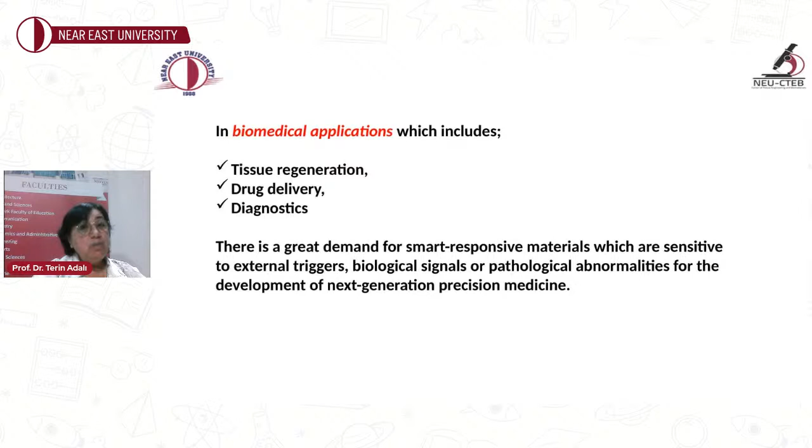There's a great demand for smart responsive materials. They have to be sensitive to external triggers such as biological signals and pathological abnormalities for the development of next generation precision medicine.

Different printing methods should be applied. A vascular stent is another important biomedical application. Medical equipment such as implantable bioinks, implantable biosensors, real-time monitoring systems can also be designed using bioprinting technologies. Polyurethane, diacrylate, semicrystalline polymer, methacrylates are types of polymers used in designing medical equipment for vascular stents. For example, shape memory polymer systems are used, along with different types of natural or synthetic polymers.

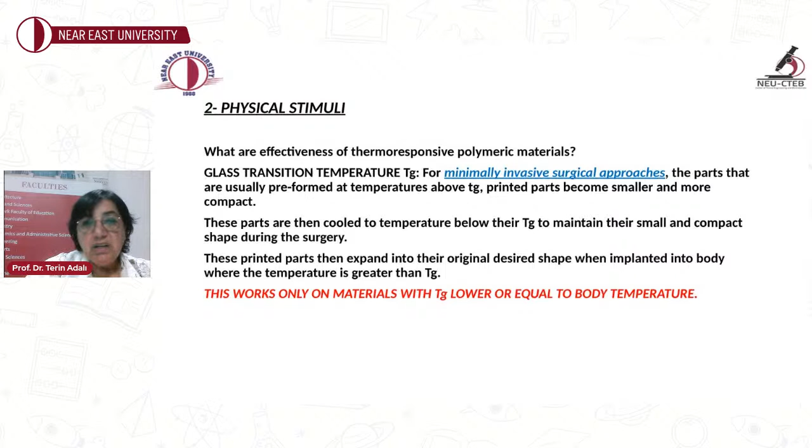Printed parts become smaller and more compact. Then they are cooled to a temperature below the glass transition temperature, and they maintain a small and compact shape during surgery. This is a very important application demonstrating the importance of physical stimuli. These thermoresponsive polymeric materials are smart, intelligent materials.

Biochemical stimuli, of course, involve enzyme stimulation. As we know, enzymatic degradability, supramolecular architecture change, swelling, collapse of structure, and transformation of surface properties are all very important in the field of tissue regeneration. Implants made of these materials are able to biodegrade and be removed naturally from the body after they have fulfilled their function.

Enzymatic degradability property is one of the important properties in tissue engineering applications.

In advanced materials strategies for additive manufacturing, smart materials can be grouped as shape-shifting materials and piezoelectric materials. These piezoelectric materials can produce electric energy upon application of mechanical stress, and quartz and zinc oxide are two examples. Biomaterials such as hydrogel biomaterials, collagen, alginate, silk fibroin, chitosan, these are important biopolymers that we are using in our research. Conductive materials, liquid metals, and carbons are also important.

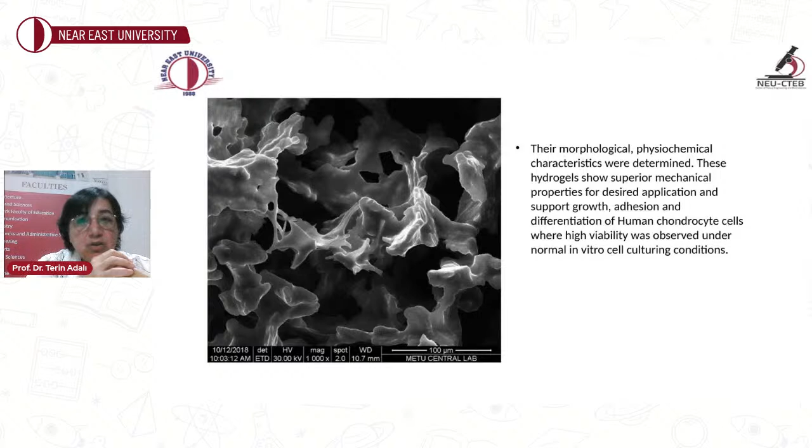Morphological and physiochemical characteristics were determined by scanning electron microscope, and these hydrogels show superior mechanical properties for the desired application, and support growth, adhesion, and differentiation of human chondrocyte cells, where high viability was observed.

Now these are results of our work. An MTT cell proliferation assay has been done, and high viability of the human articular cartilage cells in this hydrogel was observed. We hypothesize and propose these hydrogels for the design of artificial human articular cartilage.

At the end, the novel hydrogel, which is a chitosan-silk fibroin-eggshell membrane hydrogel, is a stimuli-responsive hydrogel that can be a good candidate for designing a human articular cartilage scaffold using 4D biomanufacturing, because of its chemical stimuli response towards pH, ionic concentration, and biodegradability property.

For biological stimuli, we have done cytocompatibility testing, cell culturing, and biomimicking of the articular cartilage extracellular matrix. Physical stimuli is temperature, which we also checked. So this is one of the works that can be proposed for use as an implant design for articular cartilage using 4D biomanufacturing technology.

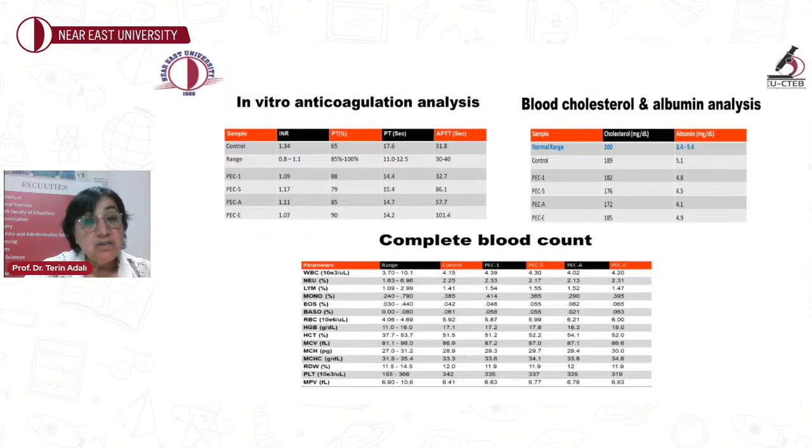So at the end, results show that characterization supports PEC1 design to be the most superior material, with favorable surface topology and the least surface roughness, for non-thrombogenicity. The same material is favorable for swelling kinetics.